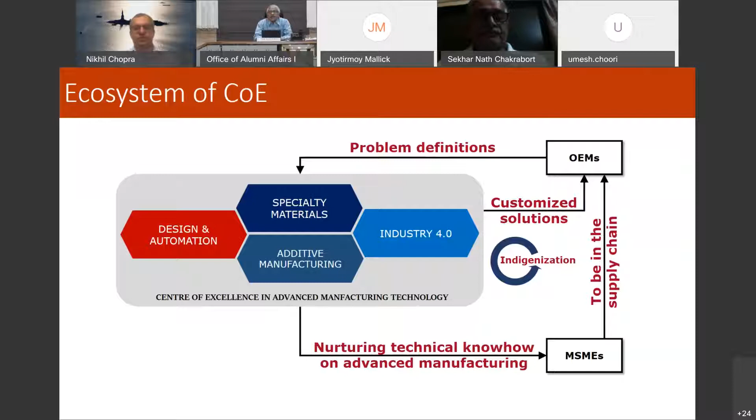We are also giving training on different aspects of manufacturing to MSME people, so they get to know what is happening in the industries, what is the need, so they can get equipped and be ready to be added into the supply chain of big industries.

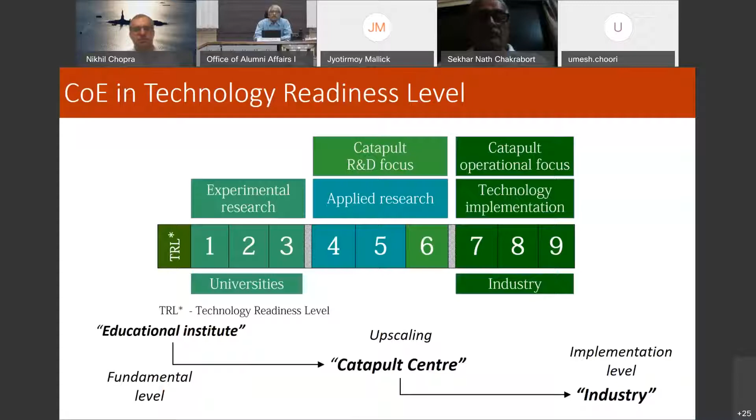The Center of Excellence would like to work at technology readiness levels 4, 5, 6, so we'd like to catapult academic innovations into industrial practice. The advantage of the Center of Excellence is that we have a large scale industrial setup, so the upscaling of academic concepts into industrial practice is very much possible here.

We have created an innovation lab with a large number of sophisticated, state-of-the-art equipment, which are used to execute the projects of the industries working with us. These facilities would also be leveraged to MSMEs and startups.

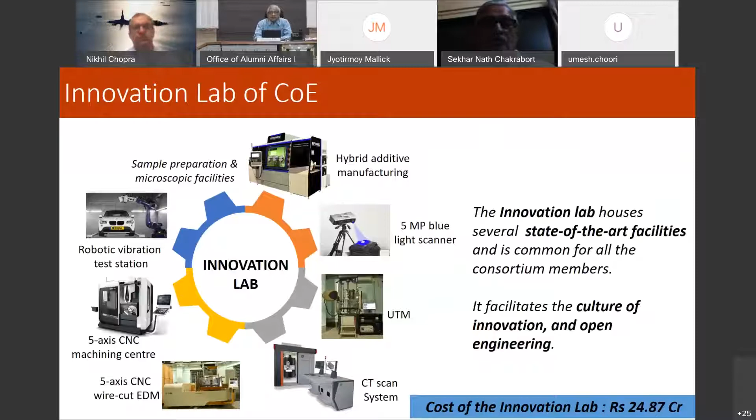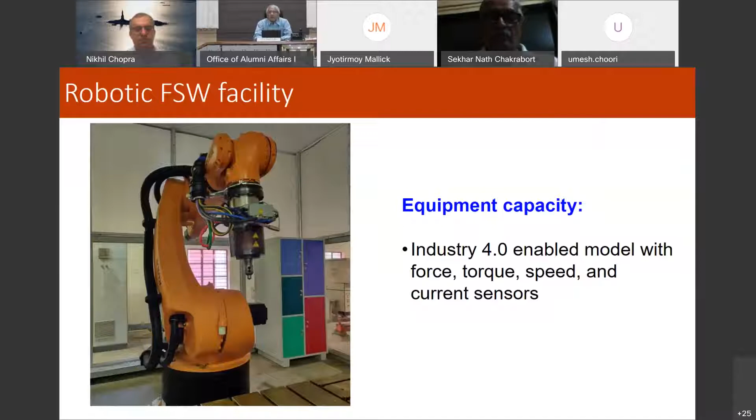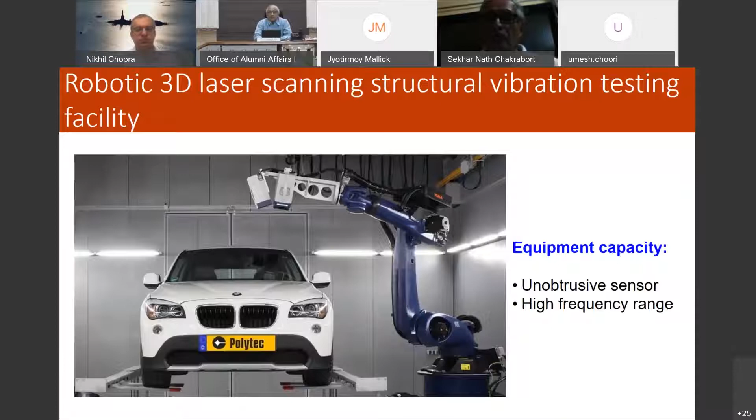We have a robotic 3D laser scanning vibration testing facility. It can be used to measure the vibration of an object at different portions through scanning. We also have acoustic holography to get to know the source of noise of any object.

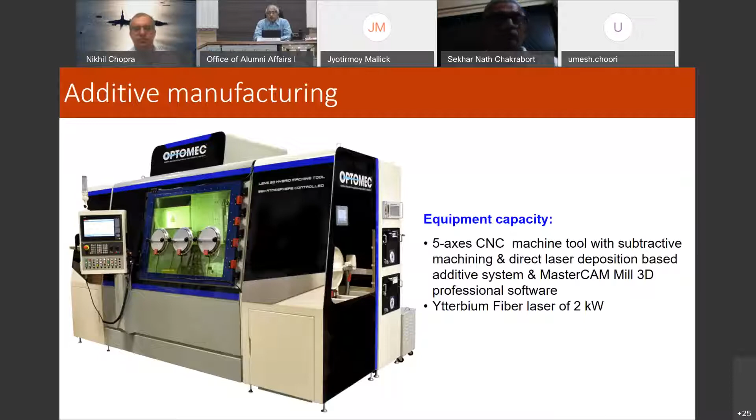We have an additive manufacturing facility, a hybrid additive manufacturing facility, which can be used to print objects close to 1 meter in length. It's a metal 3D printing facility.

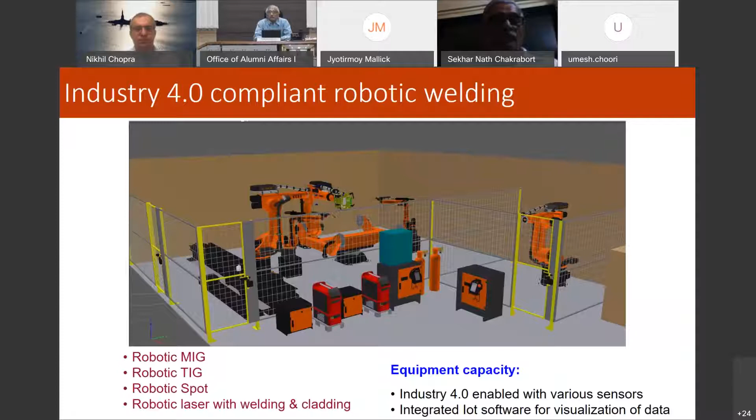We are going to have an Industry 4.0 compliant robotic welding facility - robotic MIG, robotic TIG, robotic spot, laser welding and laser cladding facility. These are all sensor integrated, so you can get to know about the process quality and also about the health of the machine when it's performing.

I'd like to briefly tell you about the recent innovations of the Center of Excellence at IIT Kharagpur. We have filed a patent jointly with Tata Consultancy Services about developing a system which should be able to real-time monitor and control the quality of the product.

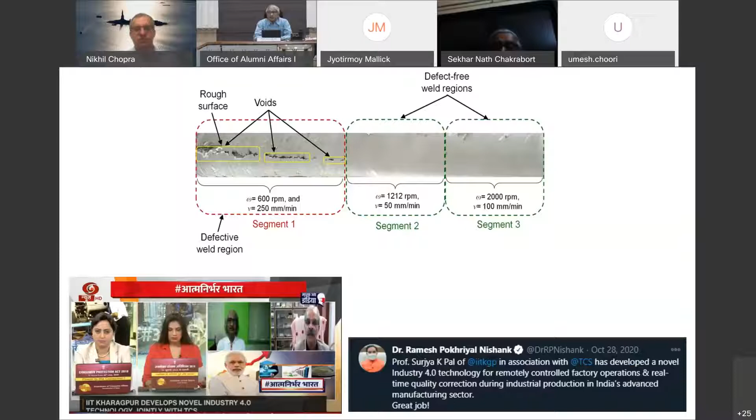We have taken up a case of friction stir welding, where through sensor data we can predict the weld quality. When the machine knows the quality of the product it is producing, it changes its parameters in real time, ultimately coming up with a defect-free weld. This has given us a lot of visibility as well.

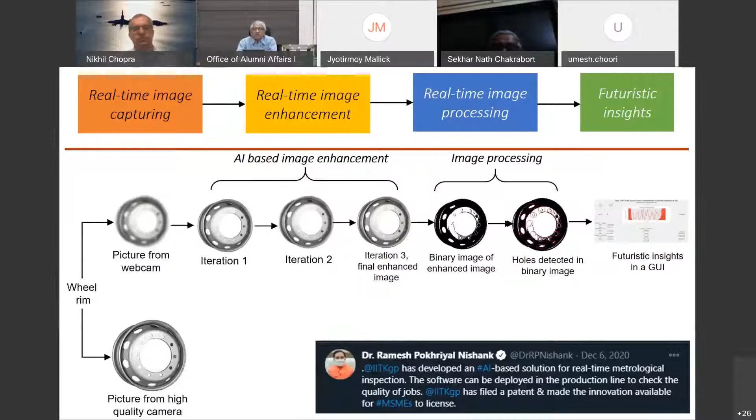We have also come up with a low-cost, real-time machine vision-based quality inspection system. This would be very useful for MSMEs to check quality in mass production. It's low cost because the image is captured by a simple webcam. We apply AI methodologies to augment the image quality, and through image processing we detect the quality of the product being produced. This has also been filed as a patent.

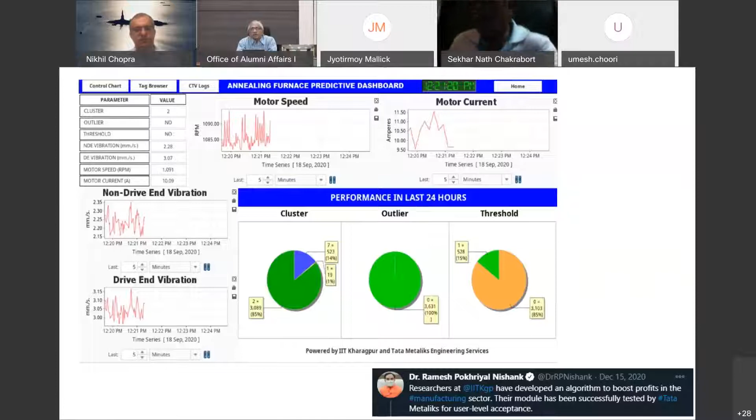The center has also come up with an algorithm to boost profit in the manufacturing sector. This is a case study our faculty colleagues did on annealing furnace performance, where different components of the furnace get monitored, and how long each will be able to perform is also predicted in real time. This has been used.

This is our center of excellence.

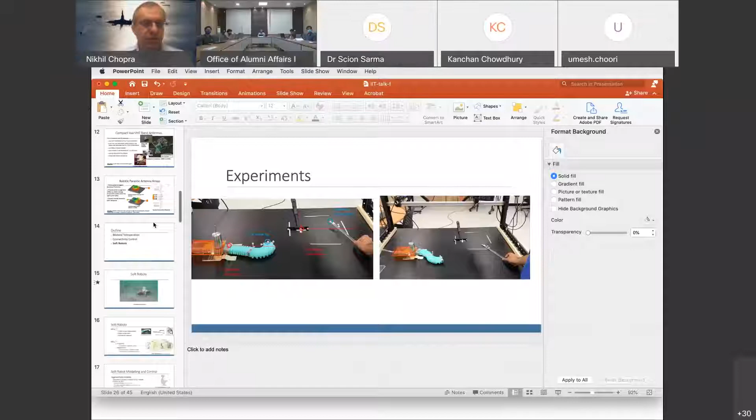It's great to be giving this talk in the seminar series, and I'd like to thank Professor Pal and COE for inviting me. Today I'm going to give a brief overview of what I've been doing, my current research projects, and then focus a little more on soft robotics as we go on.

Going back to the 1980s or late 70s, a lot of the focus in manufacturing environments was on welding tasks and other tasks in automotive plants being done by robots. Around that time there were a lot of science fiction movies imagining different things—growing up, movies like Terminator kicked up the imagination about what could actually be done. So now we come to today.

Today we see all these different kinds of robots increasingly being adopted in industry—for example, for small and medium enterprises who may not afford large expensive robots, smaller industrial scale robots like the URs have come, which can work in close collaboration and are very safe with humans. There are also walking robots and underwater robots, and surgical robotics has gone significantly mainstream, with a lot of hospitals using intuitive surgical and other companies' devices. With drones and Roombas, robots have also entered our homes, and it looks like they are increasingly getting into our spaces, and it's only going to accelerate.

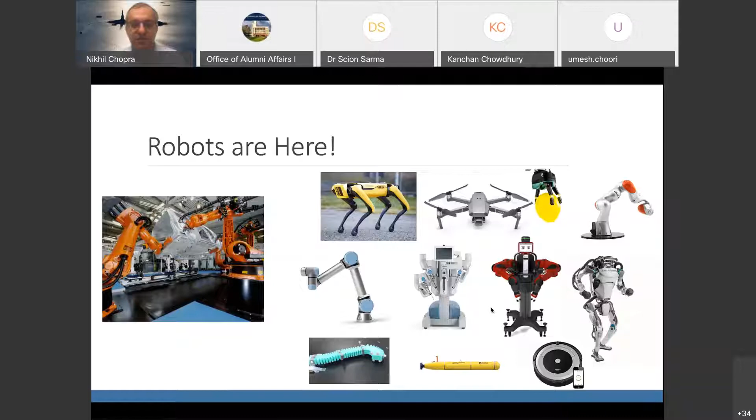It can do large deformations, so it's slightly different from all these other robots in that way. And that's what I will focus on towards the end of my talk today.

Just to give you a brief overview of the projects we are doing right now. One area I've been interested in for some time is bilateral teleoperation, on the top left. Essentially, say you have a mining project, and some of the devices people don't want to work in that environment, maybe it's hazardous, or maybe they don't know that environment well.

So what bilateral teleoperation allows you to do is operate a robot remotely while manipulating something in the environment, for example an excavator. That's just a broad example, but if you want fine manipulation you need a link manipulator. It's possible to do these kinds of tasks, and the idea is that you should be able to feel some sense of the force coming back, because we use force as a key mechanism for a lot of manipulation. You are transmitting signals back and forth, and I'll talk more about it in a subsequent slide.

Another project that is going on is with the Army, basically on maintaining connectivity in networked robots so they can do something useful outdoors. I'll talk a little more about that.

The two projects I'd like to talk about, which I am not going to cover later, is one that recently started, which broadly covers underwater robotics, but specifically is on the life cycle of growing oysters in different bays across the USA.

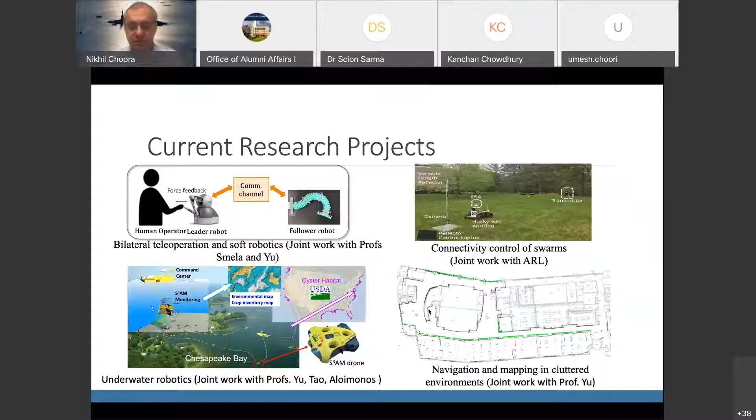So I'll first talk a little bit about bilateral teleoperation, then a little bit about connectivity, and then I will go to the soft robot control aspect.

As I mentioned earlier, in bilateral teleoperation essentially what you are trying to do is you have a robot that is close to a human operator, and then you're trying to control a remote manipulator. The remote manipulator may be in the same room, or maybe, let's say, I'm sitting here, one robot is with me, and another robot is in the conference room at IIT Kharagpur. We want to be able to control the robot to do exactly as the leader is commanding it to do, and at the same time I want to feel the force back.

So just to get an idea, we have some robots, and we developed a small demo to be used at an education conference. Just to give you an idea of what it can do, for example, these are small robots that are actually portable.

So what you can do here is, let's say you want to draw something, and the other robot is actually exactly replicating it, and you get a feel of the force coming back from that environment as well.

So this is just a small example, but you can do it for more complicated tasks, which involve maybe drilling or other related tasks that may need to be done.

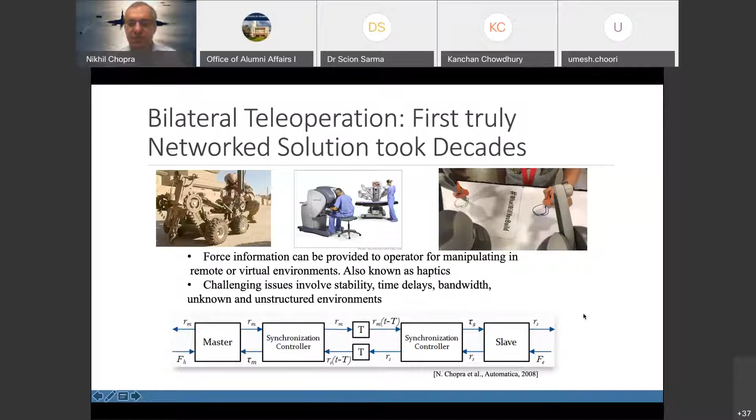And other things happen too. Let's say you have a robot that is a walking robot. In that case, it's not as simple as a simple link robot - you are manipulating many degrees of freedom, so other issues come about.

And in some cases you also need to be cognizant of the fact that you're getting overloaded in doing some task. In those situations, a lot of times what we do is use what is called subtask control, where we ensure the operator is only focused on doing a certain task, whereas other things like joint limit avoidance can be taken care of automatically.

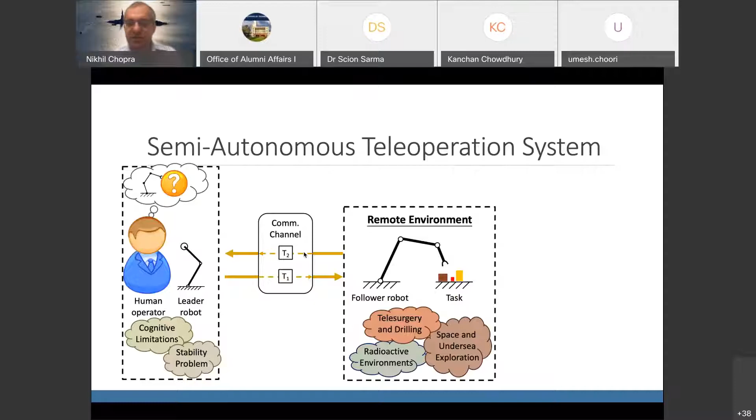Another thing becoming increasingly relevant, as you know, as 5G is coming about, there is a lot of interest in trying to take some tasks such as learning or control off the robot itself. So the robot may not have too much computation capability, but it can be done on the cloud and deployed on the robot itself. It's hard to find 5G chipsets right now for some other reasons - we were trying to do it for another project, couldn't find it. But that's kind of some of the things you can be interested in.

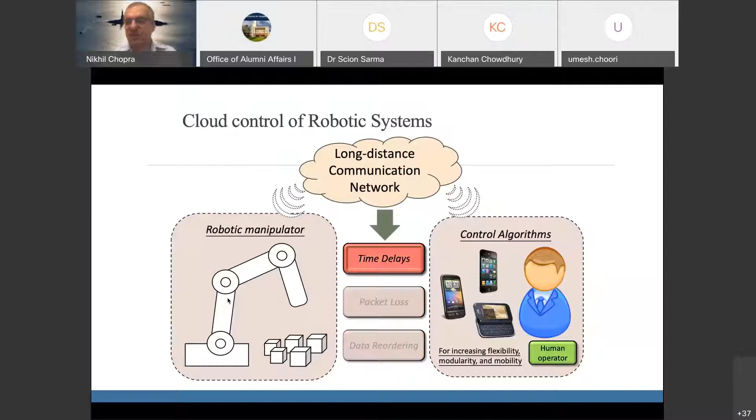So again, in this case, network issues start coming up, and we want to address them. One of the issues is time delay. So just to give you an idea of what small time delays can do when you're trying to do either teleoperation or network control.

You'll see that I'm just trying to regulate this robot to fixed joint angles. And there is a very small, maybe around 30 to 40 millisecond time delay. And that delay will completely destabilize the system.

So when you're doing this, for example when we are drilling, we find that we are banging against the wall if we are not applying the appropriate force. Something like that can come about, so when doing industrial tasks, you want this action to be very stable.

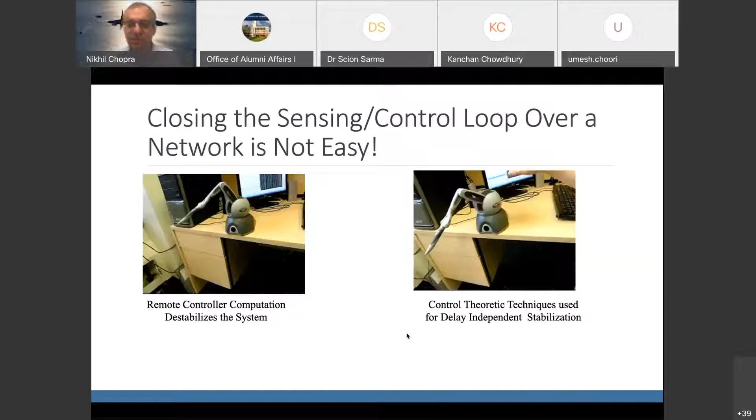So that's one of the things we've worked on. For example, now the same problem, if we use some of the algorithms we've developed, which make sure things behave normally, you can see that things can be made really stable. This was just one problem we've worked on for some time, and now we are actually using it for soft robotics as well - I'll show you that later.

Another project that is going on is on connectivity control. For example, when you are deploying multiple robots in scenarios like disasters, or trying to do first responder tasks using those robots.

So what happens in urban environments is that the Wi-Fi and UHF bands - typically what will happen is you use those kinds of communication media to communicate between different robots who may be doing a task jointly. And what happens is that if you use Wi-Fi or other ultra high frequency bands, the multipath will cause your signal to drop a lot.

It's the same as in a house, there are dead spots. But now you're not just receiving signal, you're doing some control over these signals, so you need to really take care of things. Also, they will not go inside buildings. Let's say I want to talk with my robot which has gone inside trying to get somebody out of a building. I need to be able to communicate with that robot in some way. It's very hard to do with these wireless devices.

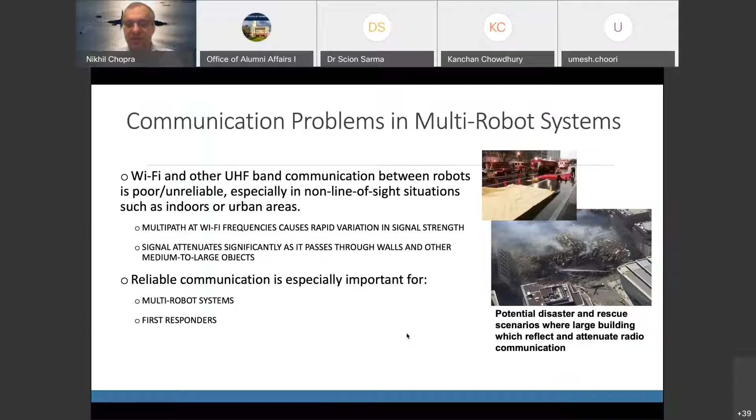Our project was basically how can you use... early on, I'm sure it's still there, but in early days when I was growing up, all we had were those antennas on the top of our roof catching Doordarshan and other related channels, primarily Doordarshan. This is something like that, using robots. Imagine these two robots are like those two metal bars, some smaller, some longer. These robots are like those metal bars.

Some are actually emitting, some are reflecting, and some are directing the signal. So how can we increase the connectivity of robots communicating with each other using these antenna arrays? Only one robot may be transmitting, the others are helping, the other robots are making a team. They're forming a formation around the robot, helping it communicate and maintain communication throughout a task. The algorithms we've come up with guarantee that if you start connected, you will remain connected.

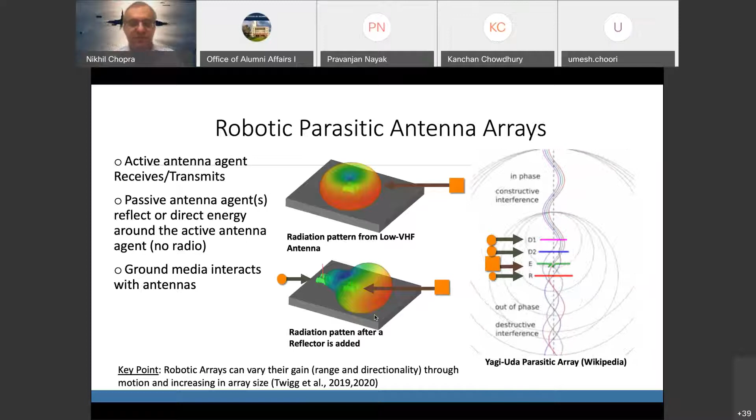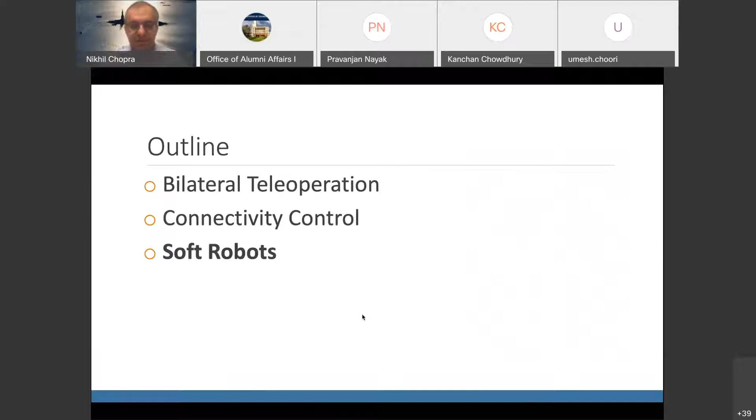So going forward, let's go to soft robots, the main topic of the talk today. What has garnered the interest in soft robots? For example, in a manufacturing environment, a lot of times the interest has primarily been in grippers, till now.

There's a commercial firm that's been quite successful, not only doing research but actually selling it commercially. I forget the name, I think it's called Soft Gripper, something of that nature. Some of the inspiration has come from the octopus in some ways, and other things we see in nature.

The constraint with rigid links or rigid robots is that I have limited degrees of freedom - there are places in my workspace I can't really go. There's limitation with that. The other thing is if I'm trying to grasp soft objects, like a food item, the grippers that are currently there are not very feasible. In those environments, soft robots come in very helpful. Because they are soft, they can go around places where it's impossible for rigid robots.

There's a video out there - you can see an octopus going through a very narrow tube, so it can traverse and locomote in very restricted places, grab different objects of different dimensions, and place them from one place to the other. These kinds of things are what's inspiring the interest in soft robotics.

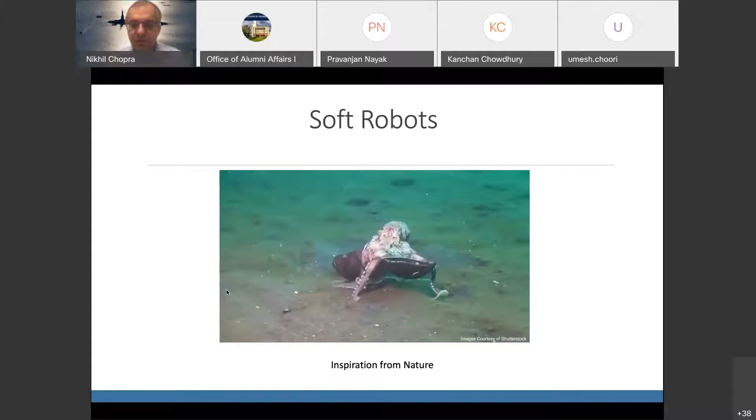The challenge that comes about is that it's a very integrative task. In traditional rigid robots, somebody designs it, a manufacturer has designed it, somebody else is developing a control algorithm, somebody else has a sensor for it, as long as it fits the specifications. The challenge here is that it's a very integrative task in the sense that everything really influences what I can do with the other. It also influences in the rigid case, but the influence is much more significant here in soft robots.

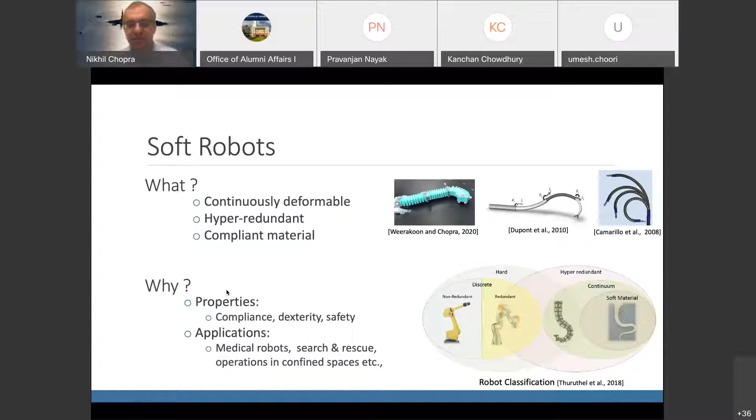I will spend a little bit of time on what kind of modeling things we are going through right now. This is the challenge, because if I were to write down the model for it, basically infinite degrees of freedom - you have modes that keep on coming. So people have come up with simplifications, and I would like to stress one fact: what I'm talking about right now is trying to do closed loop control of these robots. A lot of robots that exist right now are primarily open loop, because it's just very hard to control these - modeling them and controlling them is highly non-trivial. And sensing is also a challenge, which I'll discuss shortly as well.

One of the models that we have been working with right now, and we are refining as well, is what's called the piecewise constant curvature model. Basically what you assume is, let's say you have a 3-link robot, then each link - essentially we are controlling the first mode, if you will. Every link has a first mode that we are trying to control, and we are putting these links together one after the other. So it's a constant curvature model, called piecewise constant curvature model, because that's what it is.

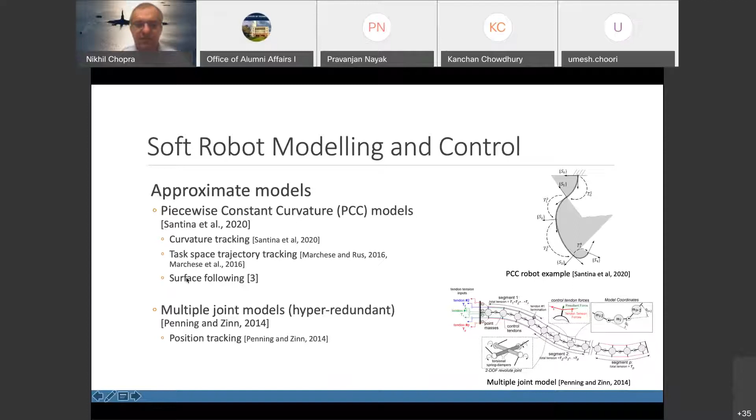There's some literature there - I'm not going to detail the literature right now. People have tried more complex models as well, but while they are a more precise way of modeling them, it's hard to control using that kind of a model - to come up with model-based controllers for them.

People have also tried model-free controllers using machine learning methods. I'll have one comment later on, which says that, using my limited experience with machine learning in robot control and estimation, what I figured out is that it's better to do it piecewise - use physics where you can, and then use machine learning where you literally have no idea what to do. Machine learning needs three main things. One is that there has to be a pattern between whatever you're trying to learn. Second, you need data.

If you have no data, or not just no data, you need a large amount of data. So if you try to do everything using machine learning, the data problem will start coming in, especially if you use reinforcement learning, because it's very hard to gather the data from experiments, and you really need simulators, and other problems start coming in as well - you want to transfer that simulation.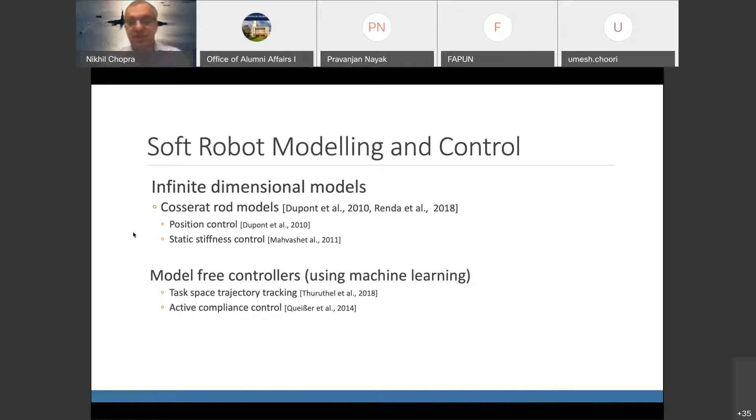Usually what I found is a combination of physics-based methods and machine learning where you want to use them will come in helpful. But completely model-free methods are not very generalizable, in the sense that if you do it for one robot, you want to not just do it for that one robot you have, but other people should be able to replicate it with whatever robot they have. That becomes the challenge in using completely model-free methods for everything.

So once you do this approximation, typically this becomes an RPPR kind of mechanism, where you're approximating by having a mass in the middle. If you do it for all the links, you can come up with the Euler-Lagrange model that looks like this. There are some parameters you do not know, like the torsional damping and even the torsional stiffness. You have to kind of estimate these, which inspired some of the adaptive control algorithms we used for these robots, which I'll briefly discuss. So it's a simplified model of the real object, but it works reasonably well in experiments.

But there are some parameters that are uncertain, so you either need to do system identification some way, or use adaptive control methods when you are trying to track. So the idea was that we wanted to...

Hello, yes sir. Can you elaborate how does it become RPPR, that is revolute prismatic revolute? How does it become? Can you elaborate a bit?

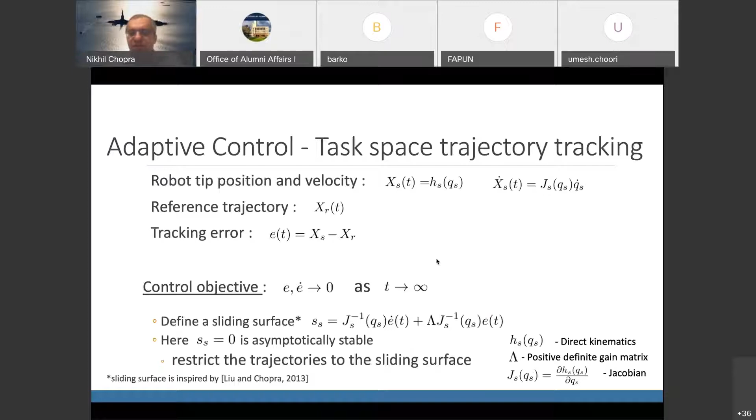So basically the task was that we wanted to control this robot in the task space. Task space basically means I want to control the end point of this robot and how its trajectory is moving, so I can control it in the XY plane. In this case we were doing the XY, so you want to control in that plane. These are some of the standard methods we've done earlier, inspired by previous methods in the literature as well.

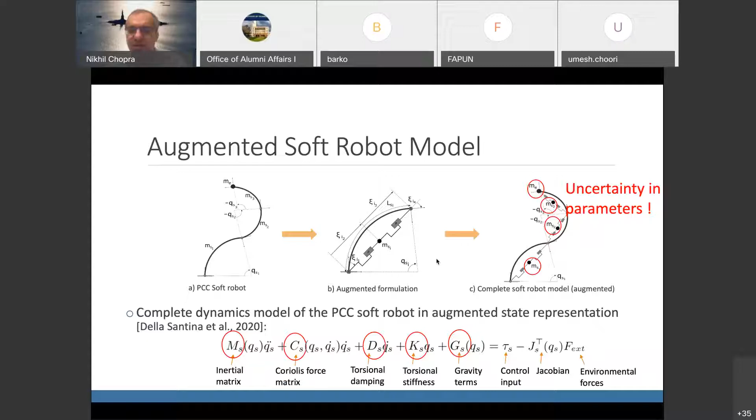I'm not going into the math details here, but basically we did some adaptive control design because we didn't know the torsional stiffness and torsional damping. We had some nominal ideas of what the values were, but we don't actually know these values, and we want the tracking to be good. So we had to utilize some estimation algorithms which estimate these parameters in runtime and then apply the control appropriately.

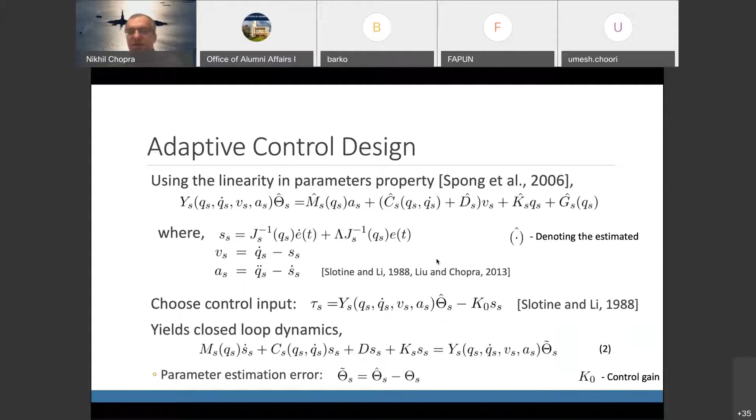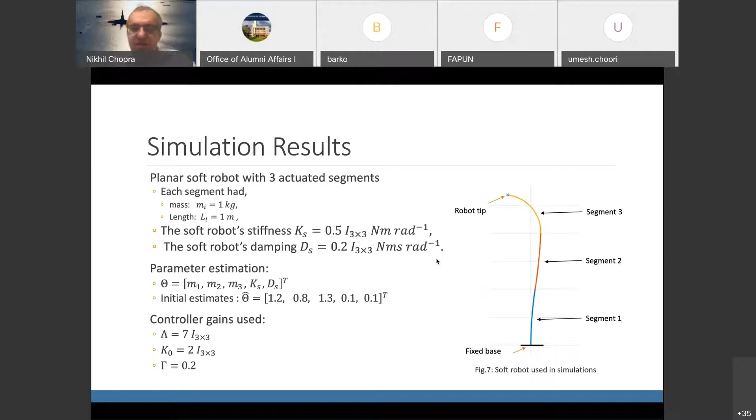So first I'll do a simulation and then show you an experiment of what we did. In the simulation, you basically have 3 actuated segments: segment 1, segment 2, segment 3. You have some initial estimates of these parameters, all stacked together in the theta hat vector that you see. This is just a simulation where we are trying to follow a desired trajectory in task space. This may be challenging, depending on if you have a rigid robot, with a complex trajectory it may not be viable to implement.

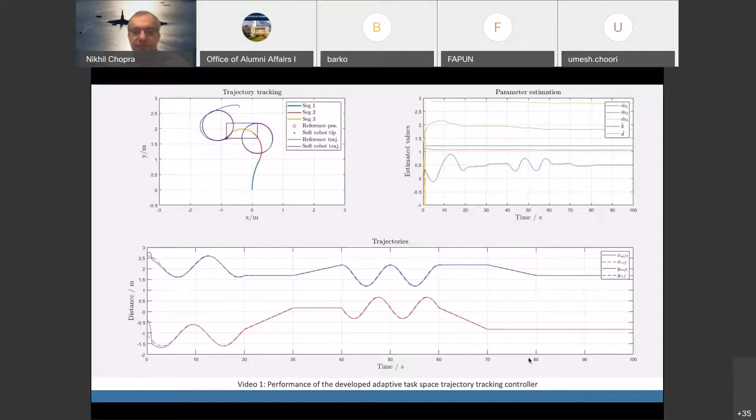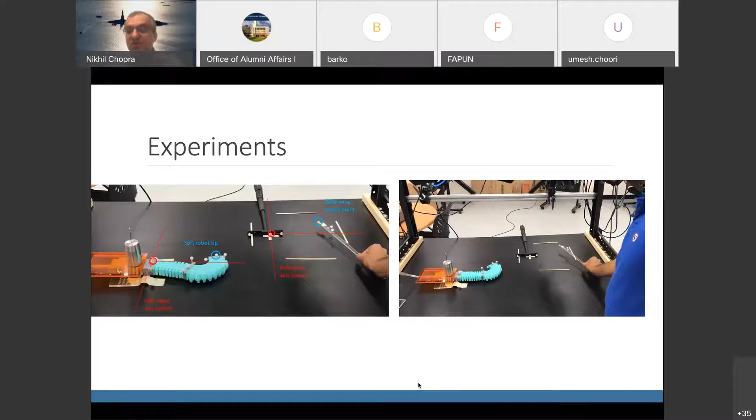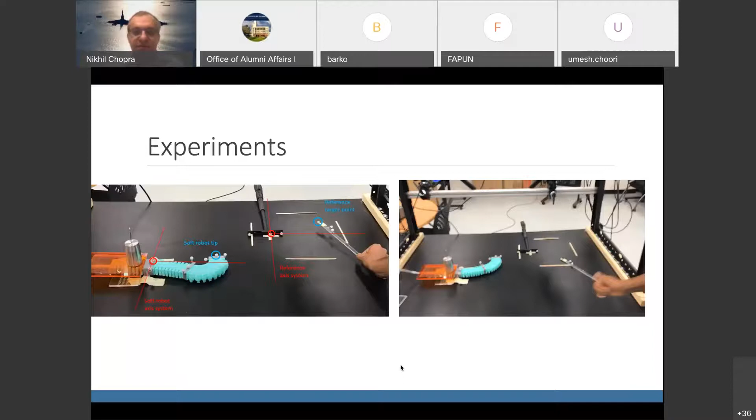So what you saw was just a tracking task. You can similarly use a soft robot. Let's say somebody is doing a task and they want to be able to control this in some task space, and again feel some force back. So we can do a similar thing here as well.

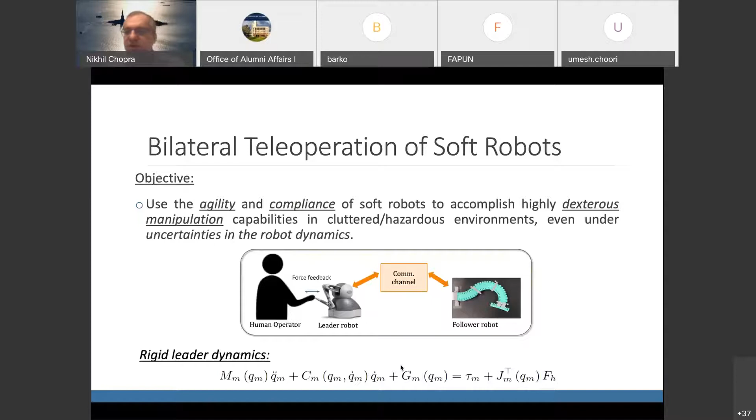So again, we have some trajectory tracking algorithms, I'll just quickly go through them. This is the setup that I wanted to show. One of the key things here is that I'm using cameras, some motion capture OptiTrack cameras, and tracking some particular circular markers on top of these robots, which help me estimate the bending, the curvature, because I want to control the curvature. So I need some way to sense that curvature.

Sorry, couldn't hear you. Is there a question? Yeah, please proceed. Shall I continue? Okay, I'll proceed.

So basically what is happening is we are trying to control this curvature, so we need some way of sensing it. Right now that's being done by the camera. That's a limitation, because how will I use this robot outside if I have to use a camera all the time? That's a constraint we recently solved in a paper coming out at ICRA this year. That kind of motivated our next part of research as well. Let me just show you.

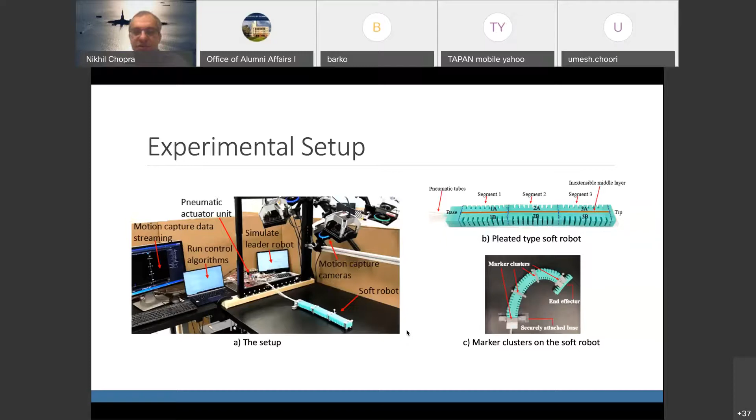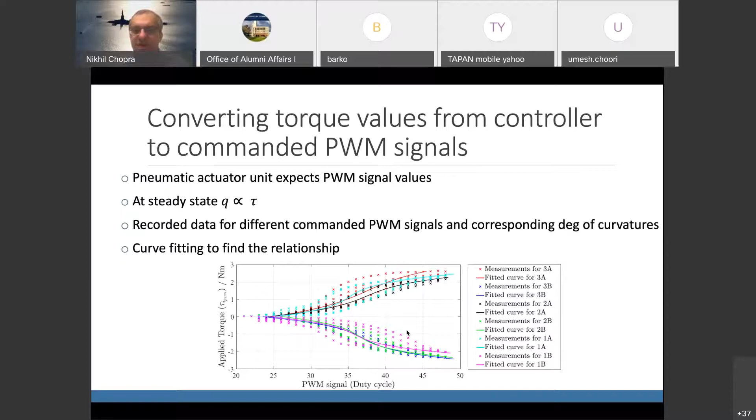So we basically need a torque signal, and we're getting PWM signals, so we first have to do some curve fitting to match them up. This is how the experiments look: one experiment without subtask control, and the other with subtask control. That was one of the things I mentioned earlier. The constraint put here was that in some cases you can't go beyond certain curvature limits—let's say this robot cannot exceed certain curvature limits, due to whatever reason.

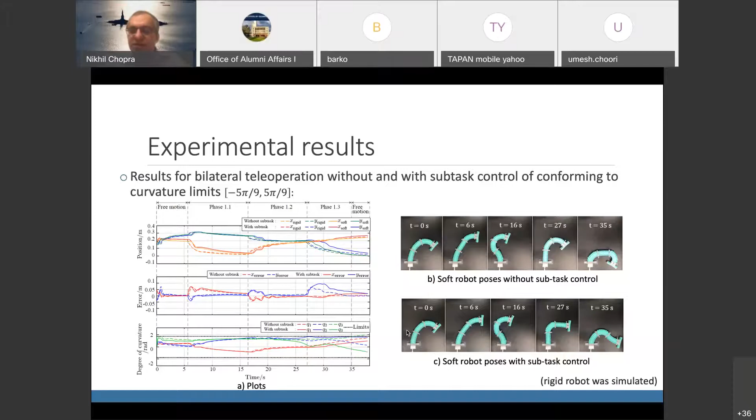In the first case, the robot is allowed to bend whichever way it wants to in achieving its goal of trying to track something in the XY plane. But in the second case, we can still do it with subtask control. We don't have to manually enforce it, we can add it in the controller. Similarly, we can do some other tasks where we see certain regions where it contacts an environment, and we can feel that force back from that environment.

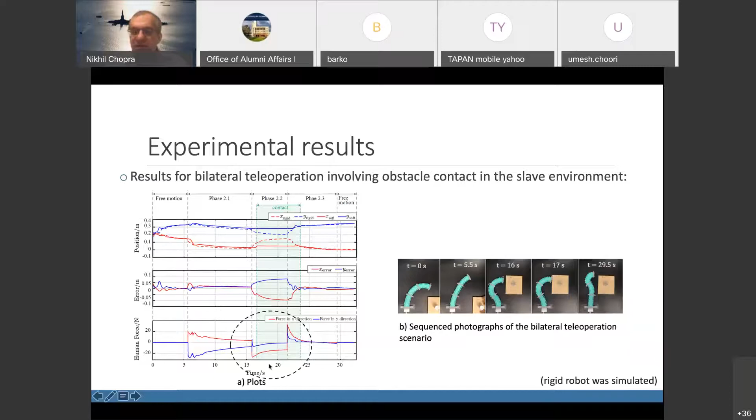So the insight we got was that there are obviously some practical issues that come about, which is actuator saturation and related issues, where because I have a limited torque, I can't generate whatever torque my controller tells me to. I have some limits there. So how do we take that into account? This is a slow process, so we looked at some other things to accelerate it.

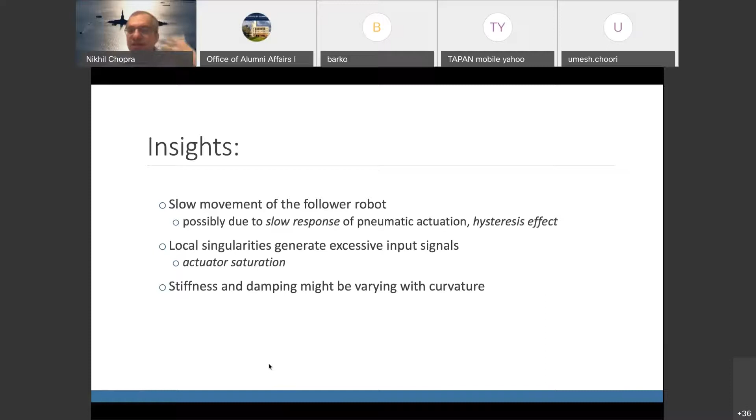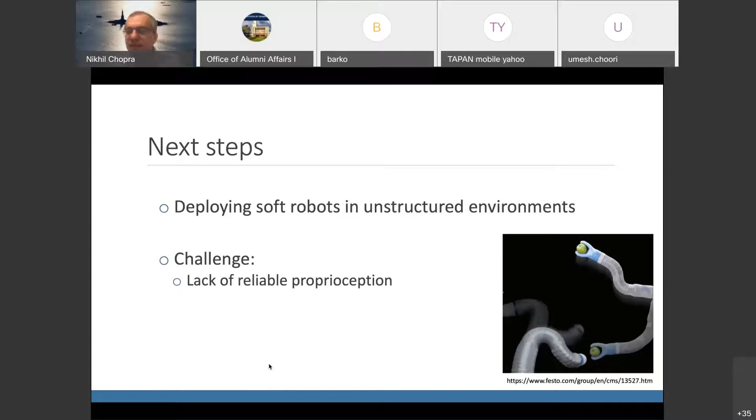One of the critical things we came about was that I need to use this in unstructured environments. So how will I sense it? I can't have the camera everywhere I go, wherever I want to do this task. So this inspired, in collaboration with colleagues who work on sensing, we utilized some of the sensing skin that they had come up with. This sensing skin can be put on any robot, and what that does is allow you to measure the bending strain.

So from the strain, how do you translate the strain to a bending angle? That's where we use machine learning, and we found it very helpful. I'll show that shortly - it was like an intelligent sensor. You have raw sensor data coming from this skin sensor, and how do we translate that to an actual bending angle that we can use in our controller?

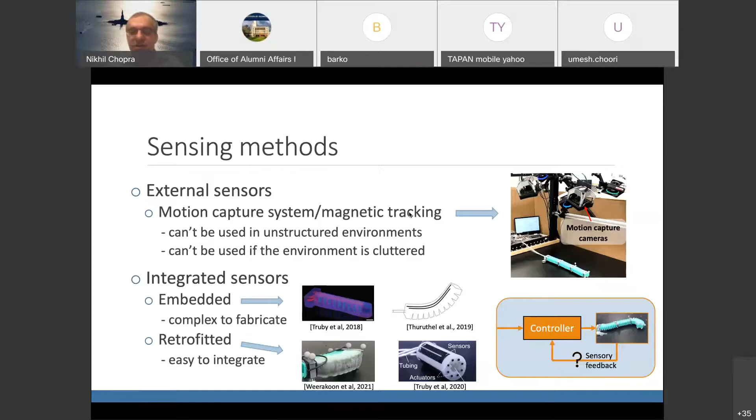So this is basically the sensing skin you see - a soft sensing skin. It's on the sides; you see it is on both sides measuring, because the robot can bend in one direction or the other, so bidirectional bending is possible. So we had to have this active sensing area on both sides.

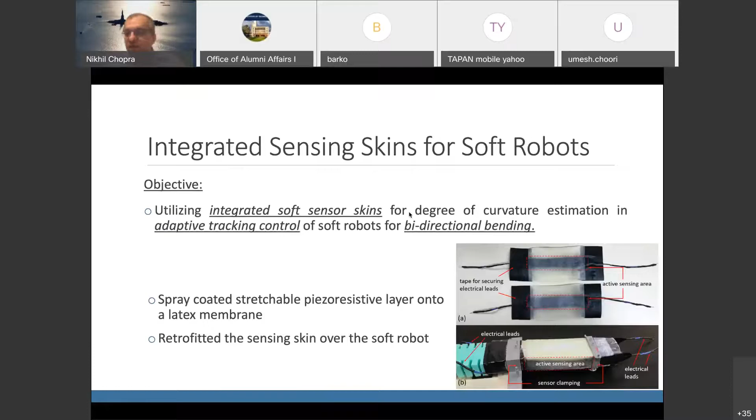We took our robot and just attached this sensing skin on top of it. So this is the setup you see - we have soft sensing skin A, soft sensing skin B, and this is the thing we ran. We were using cameras to get the ground truth for this sensor, so that we could train the machine learning algorithm.

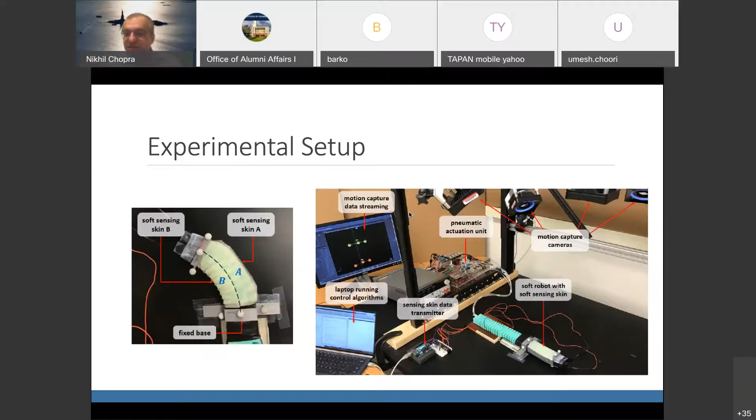So we are using vision to get the bending angle, and then seeing what sensor data we are getting from these strain sensors, and coming up with a mapping between the two. This is where we used LSTMs, which is a kind of deep recurrent RNN that we used.

In a machine learning pipeline, you have different things like validation, so that you select the appropriate parameters in a learning module - for example, early stopping and number of hidden units. So we did all that. You're doing regularization, doing validation to select those parameters, and then we have a test set. So this was the performance on the test set.

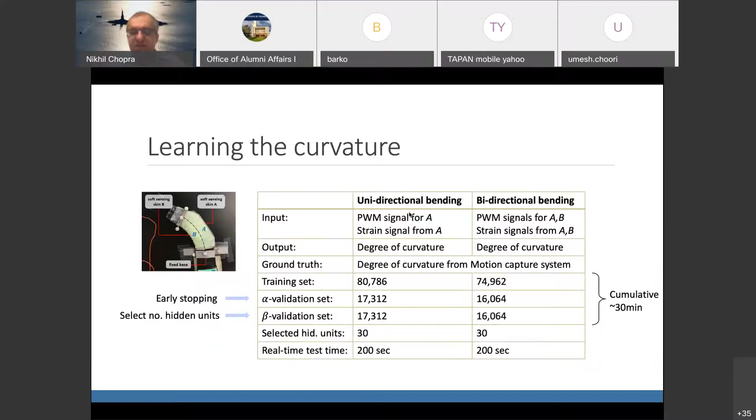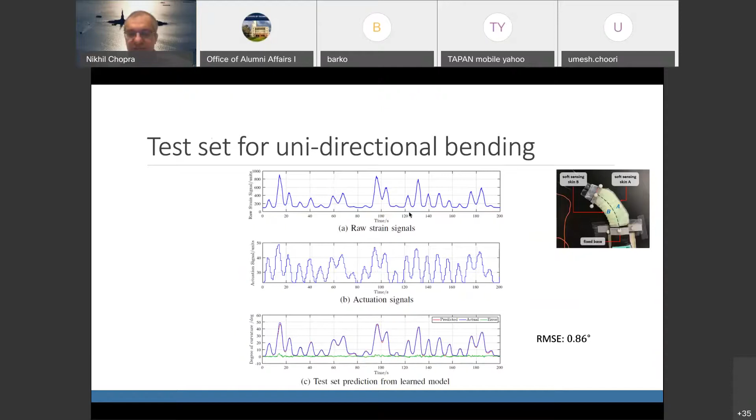As you see, the error on the test set was relatively low. And again, this is for the bidirectional bending - we were able to have a reasonable error in our predicted model.

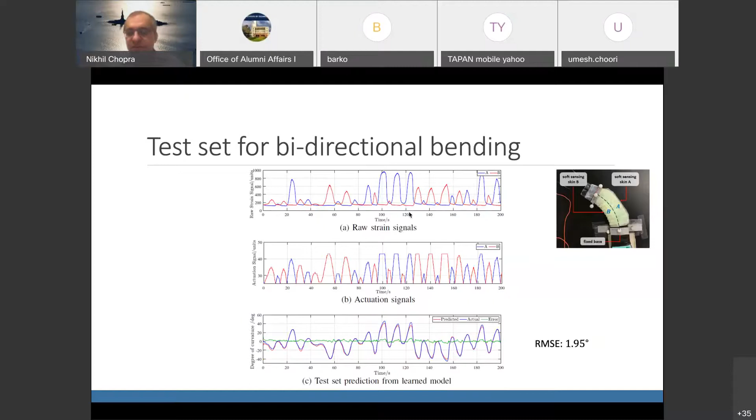We are still trying to get more high frequency target, but we are also limited by the speed of response of our system. So that's a fundamental constraint that we have.

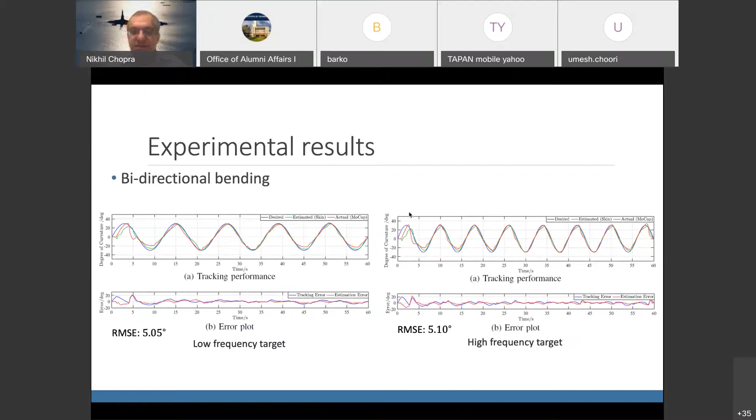Recently, what we are doing is trying to do some more complicated tasks. Our idea is can we make this robot do things that the rigid robot is doing right now. As you see from the speed of response, it's slow. Another thing is that when it contacts a surface, that constant curvature assumption will be violated, because it will start bending in ways that are not satisfying that assumption. So we want to be able to do really more sophisticated control of the soft robot.

One of the things we are starting with right now, we have some results but I don't have experiments to show right now. Hopefully later this summer we will. What we are trying to do is one of the challenge benchmark tasks in control, stabilizing an inverted pendulum - swing it up and take it to the top and stabilize it there. We have come up with some control algorithms recently that we are shortly about to submit to some conferences, and basically we can do that.

So you can take a soft robot and do much more complicated control and challenging tasks that are very difficult to do normally - even with a rigid robot they are non-trivial. So how can we do them with soft robots? We don't have experiments right now for that, but hopefully next time.

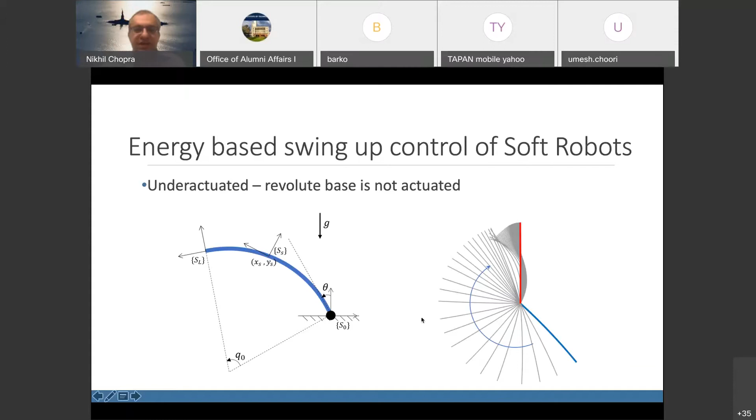I'd like to end the talk with some take-home messages that I thought were relevant. The transition pace of robots to the consumer world is really accelerating. Hopefully in the next 10-12 years we will have much more in-depth integration coming about. In industrial robots, one of the key things is that they need to work safely with humans and other robots, so how do we ensure that is very important.

For industrial robots, one of the key things needed is, for example, welding - we need tracking algorithms that work well despite flexibility of the robot joints and stuff like that. The network is also increasingly becoming a very critical part of sensing, monitoring, and controlling these systems, but they bring about some safety and security issues which also need to be dealt with.

In soft robots, the designers of the sensors, the designers of the robot themselves, and the people designing the control algorithms have to work together. It's a very integrated task, and it's hard to separate this out, particularly for soft robots.

I already mentioned that we have used learning, for example in sensing, developing intelligent sensors right now, and we have also used a little bit in control as well. But what I feel is that completely model free - meaning I just take the raw sensor data I got and come up with control algorithms for it - may not be useful. I think we can use the physics as much as we can, and then use machine learning where we really run out of options, where there's a pattern but we can't detect it ourselves. So we need machine learning to detect that pattern for us - that's where it becomes very useful.

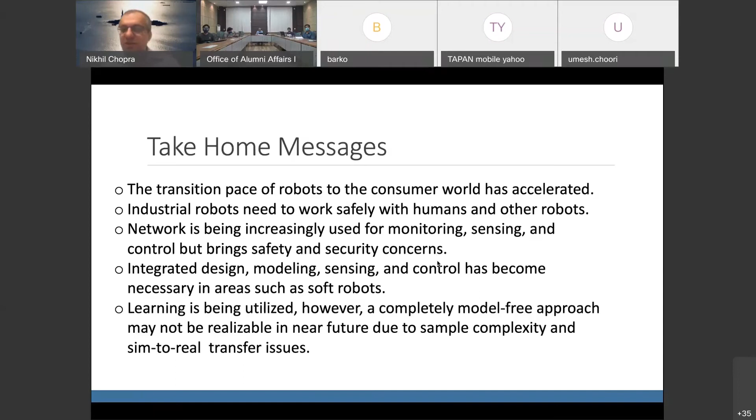Yeah, thank you. Thank you. It's a very nice presentation.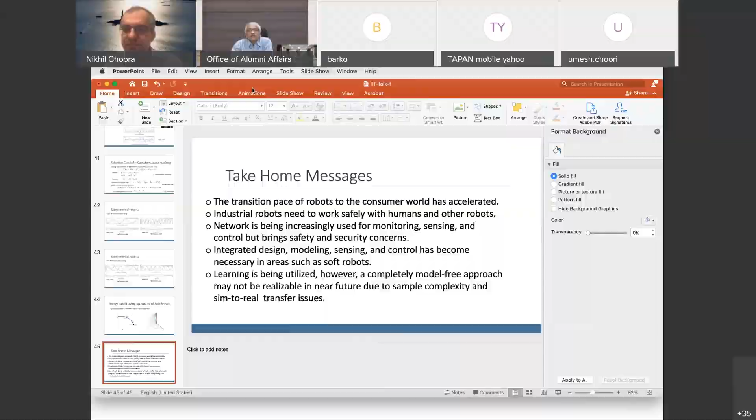And you have rightly told that industrial robots need to work more safely with humans and other robots, because we are residing today in the Industry 4.0 era, and we are working with hard automation in robots. We are getting transitioned towards flexible automation and all. But the concept of soft robots will be very much needed and useful for tackling dynamic, unstructured situations, which is very much needed. At the same time, I can understand that communication between two robots, operating in dynamic situations, would also be very difficult. So it's a wonderful talk.